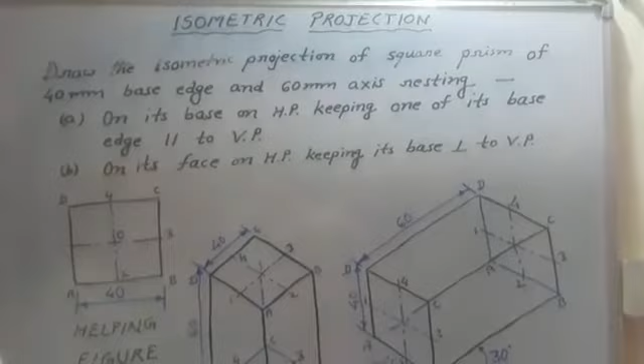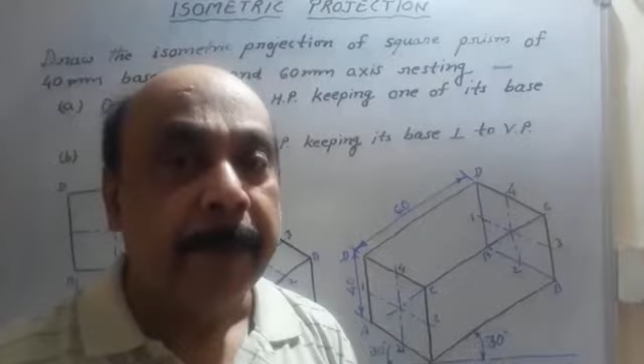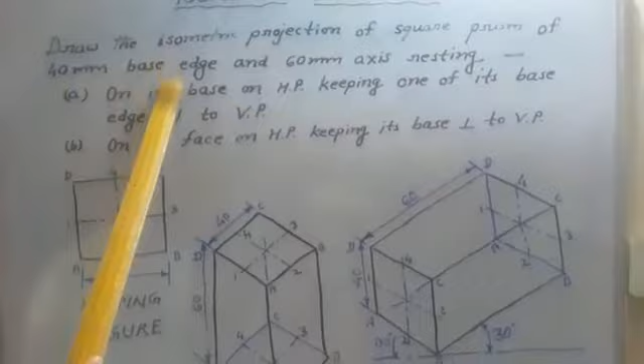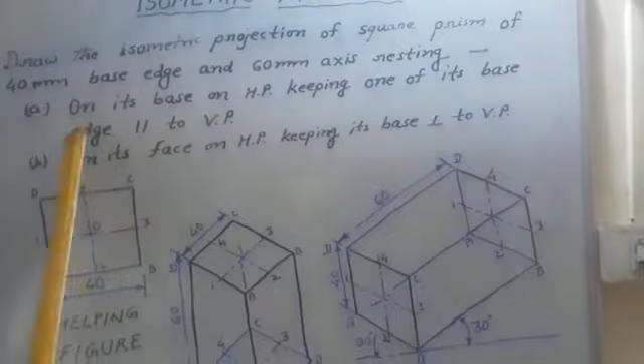Draw the isometric projection of a square prism of 40 mm base edge and 60 mm axis. First case: resting on its base on HP, keeping one of its base edges parallel to VP. Second case: resting on its face on HP, keeping its base perpendicular to VP.

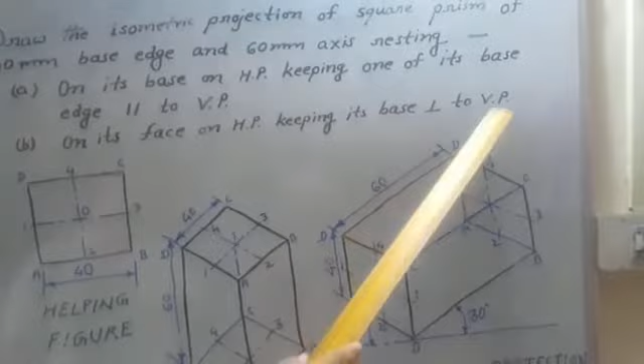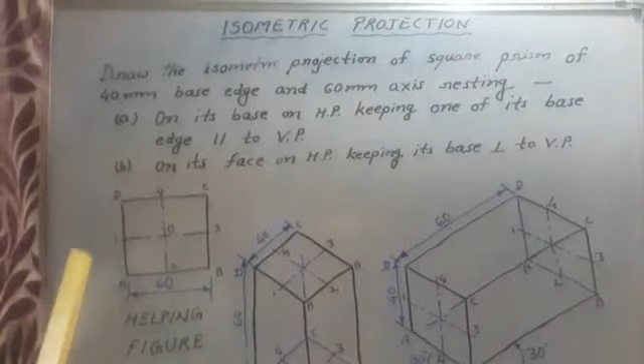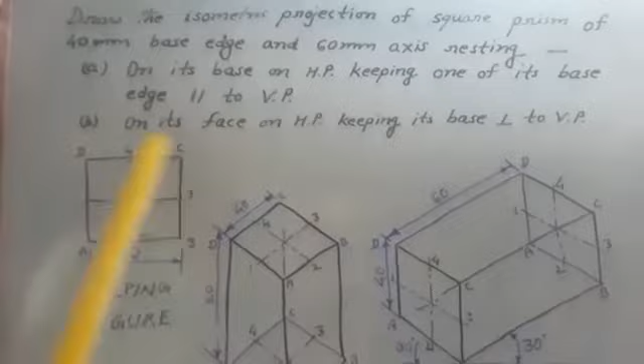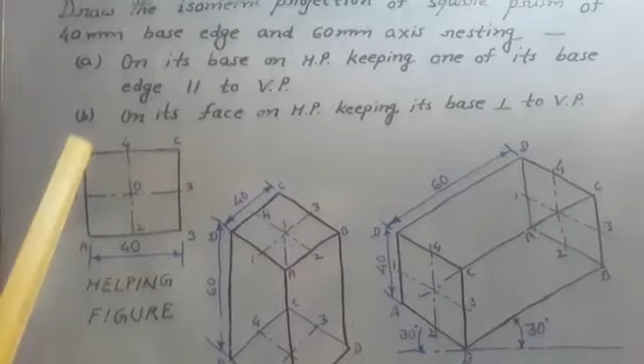First we draw the helping figure. We have drawn a square of 40 mm, taking 40 mm on each side. Now draw the horizontal axis line 1,3 and vertical axis line 4,2. Now we proceed for the isometric projection.

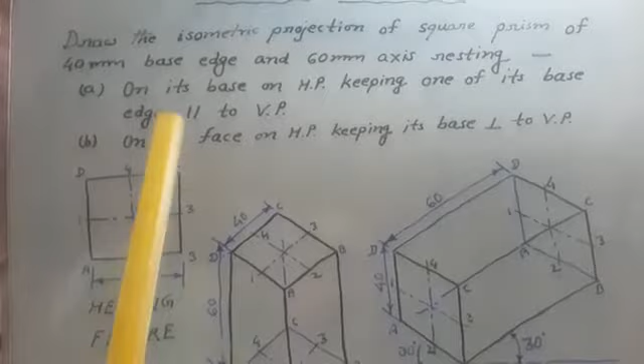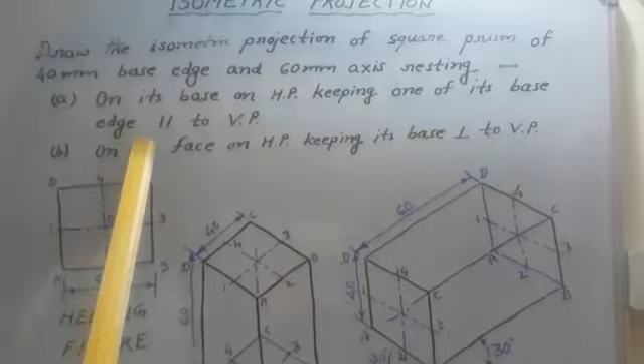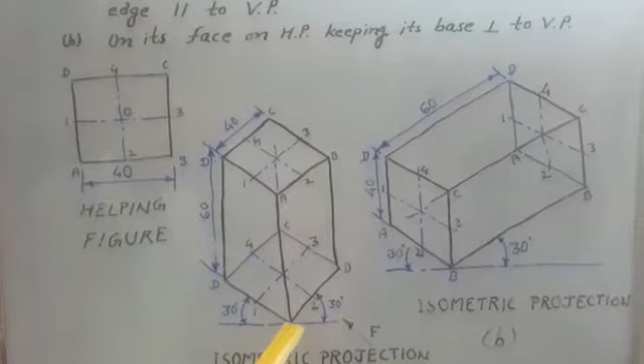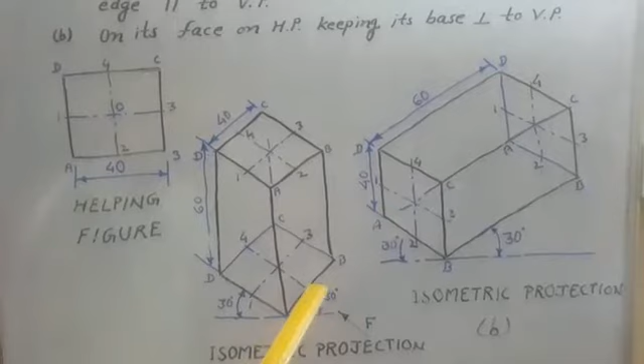Our first case: the square prism is resting on its base on HP, keeping one of its base edges parallel to VP. First we draw the baseline, take a point A on it, and draw two lines AB and AD at an angle of 30 degrees on both sides.

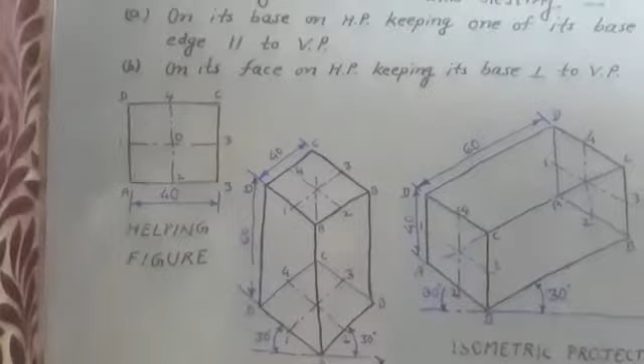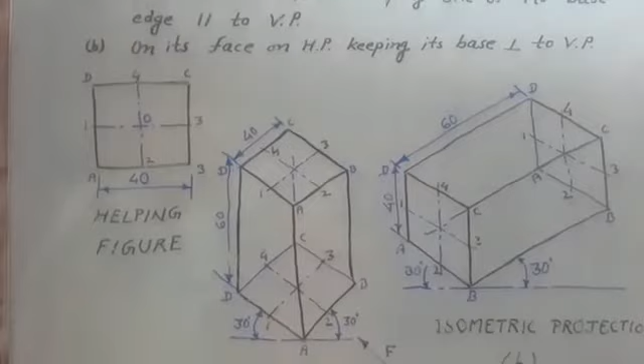Now we take the AB distance of 40 mm in the compass, and with center A, cut this line AB. Similarly, we take 40 mm for AD, and with A as center, cut this line AD.

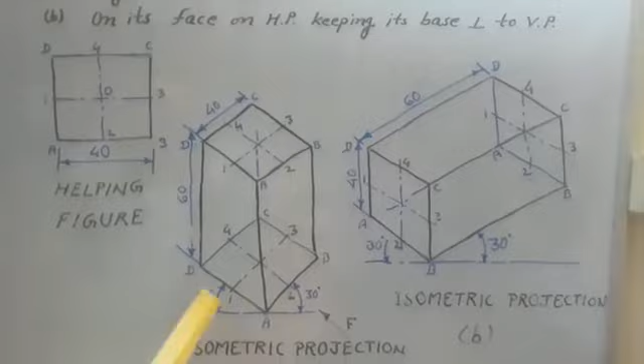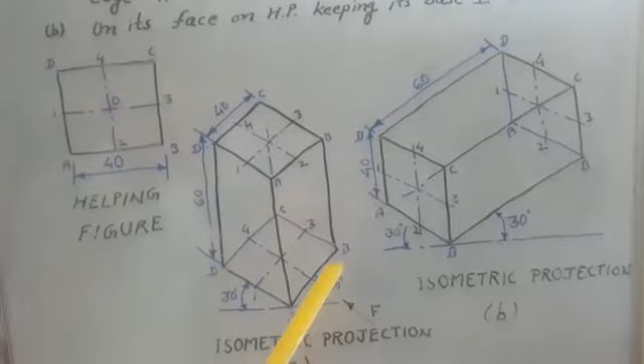Now complete the rhombus. We put the ruler on AD and move up to B to get line BC parallel to AD. Similarly, put the ruler on line AB and move up to D to get line DC parallel to AB. In this way, our first rhombus is completed.

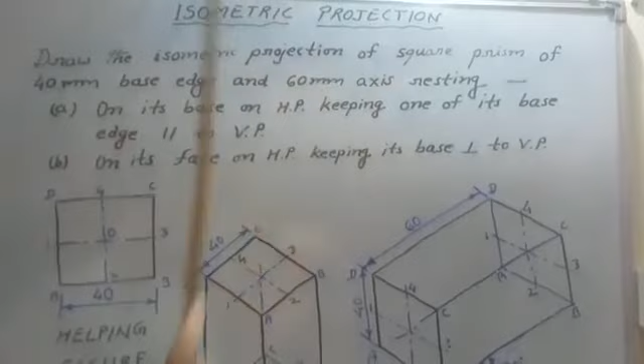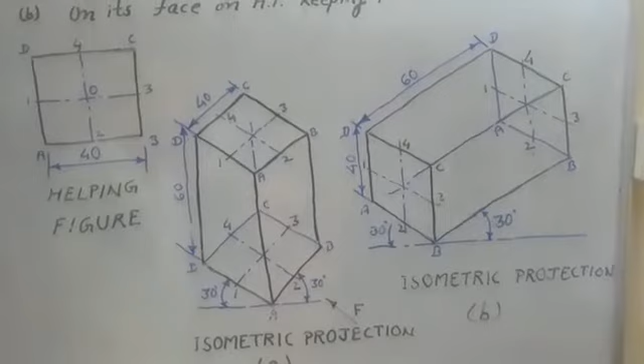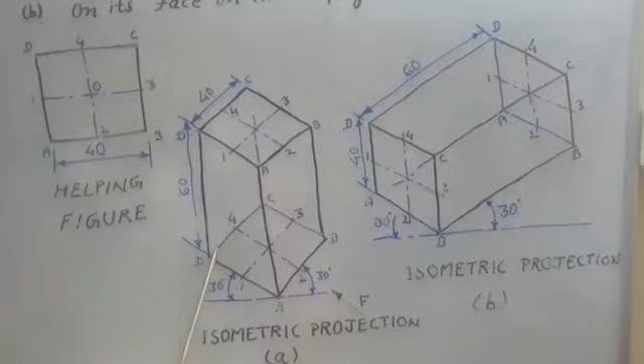Now mark the horizontal axis line 1,3 and vertical axis line 4,2. The height of the axis is given as 60 mm. For isometric projection, we multiply 60 by 0.8, giving 48 mm, so we draw 48 mm but mention 60 mm as the dimension on all three lines.

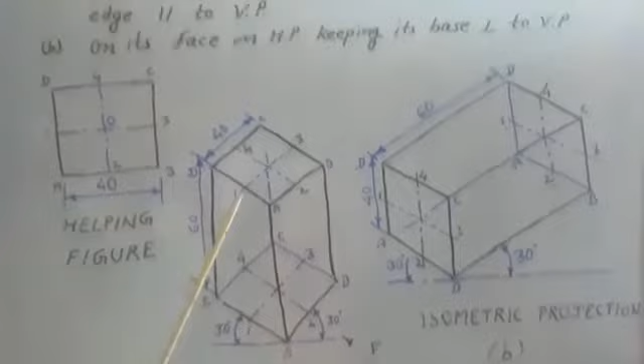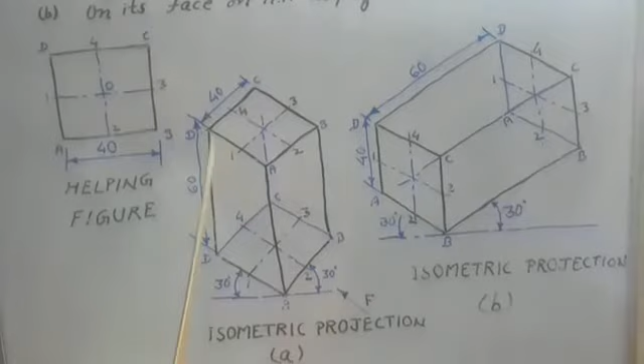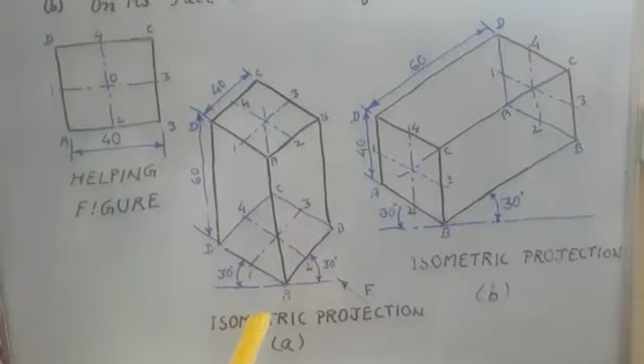Now complete the upper rhombus, similar to the previous one, drawing horizontal axis line 1,3 and vertical axis line 4,2. Now join the visible edges DD, AA, and BB, shown as thick black lines. Mark the dimensions: DC equals 40 mm and height DD equals 60 mm.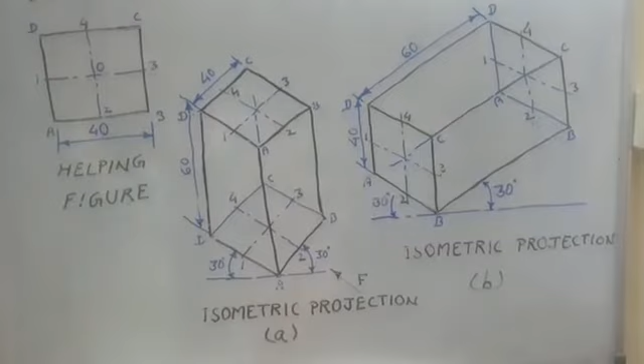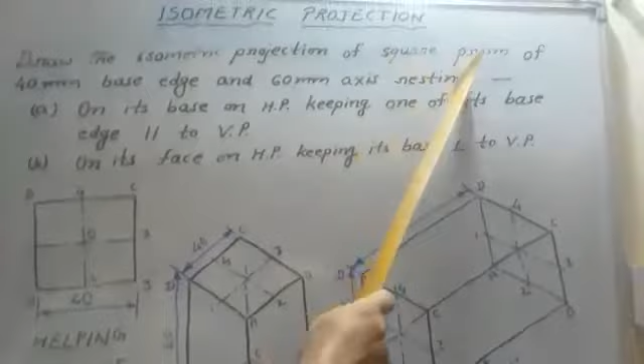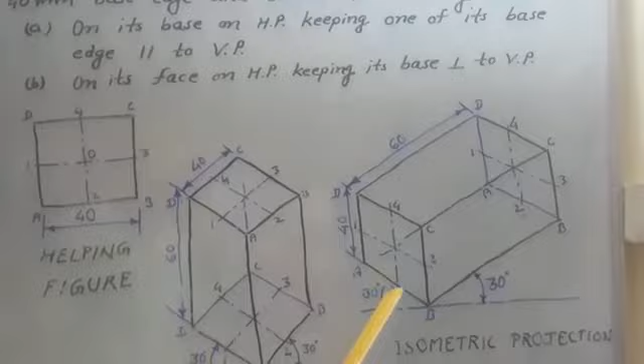Now we proceed to the second case. Here, our square prism is resting on its face. In the previous case, the square prism's axis was perpendicular to HP, but in this case, the axis is parallel to VP.

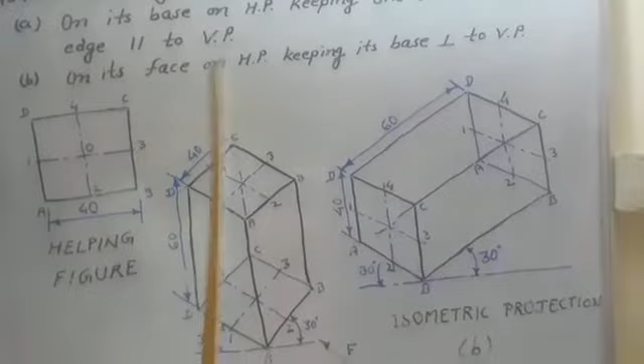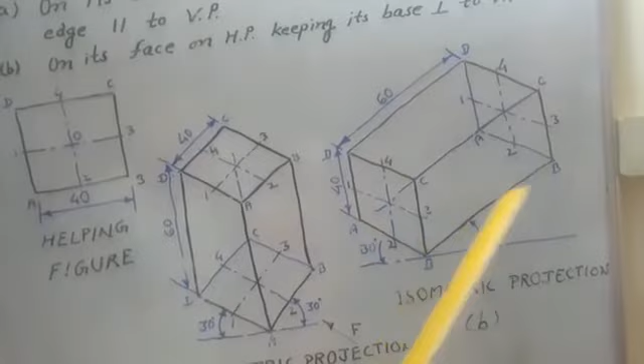Since the square prism is resting on its face on HP, we take the length as 60 mm — this height of 60 becomes the length in this problem, drawn at an angle of 30 degrees on both sides. Here AB equals 40 mm and BB equals 60 mm.

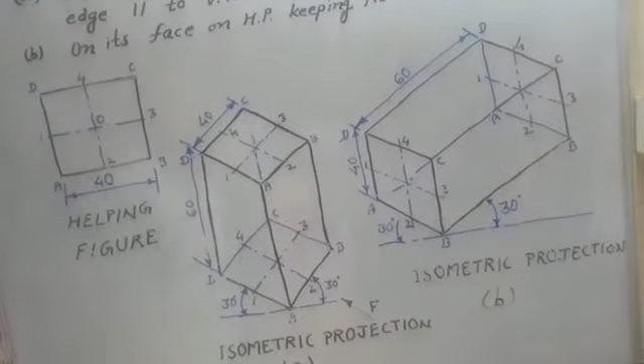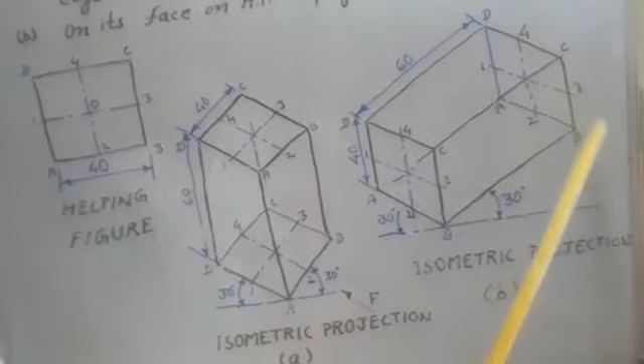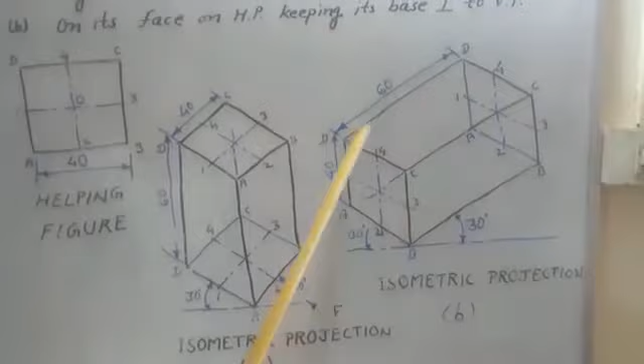Now we complete the square using 40 mm on each side. Similarly, complete the other square with 40 mm sides. Now join the long edges BB, CC, and DD, and in this way the square prism is completed. Now mark the dimensions.

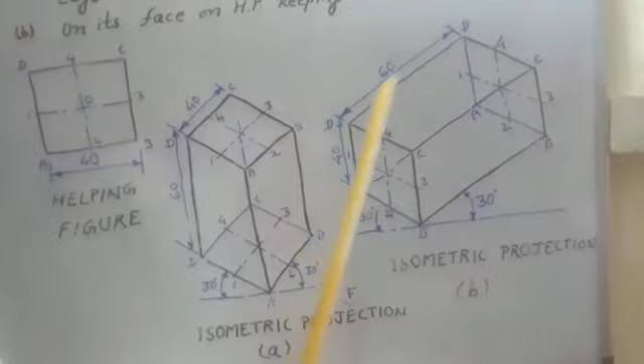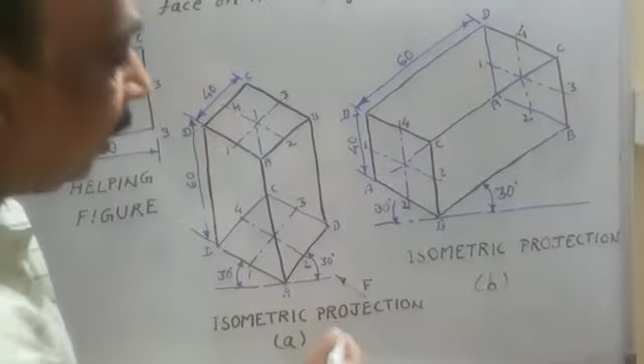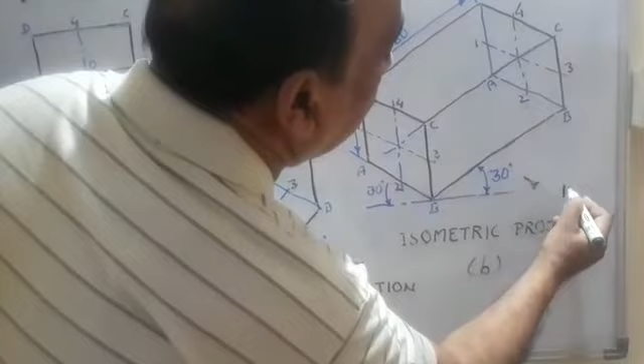DD equals 60 mm and AD equals 40 mm. Mark the direction of viewing here, and similarly mark the direction of viewing on the other figure as well.

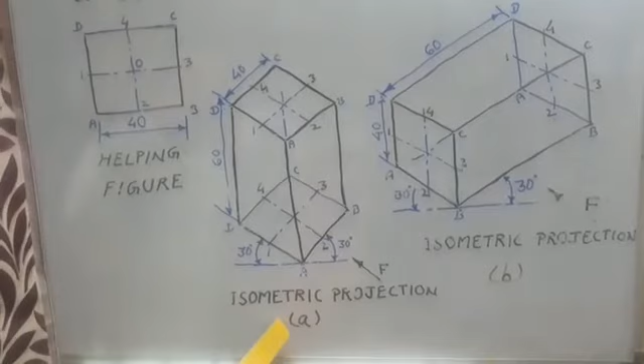Now, lastly, write the titles in the diagrams: helping figure, isometric projection, isometric projection — this is case A and this is case B. Now our drawing is completed.